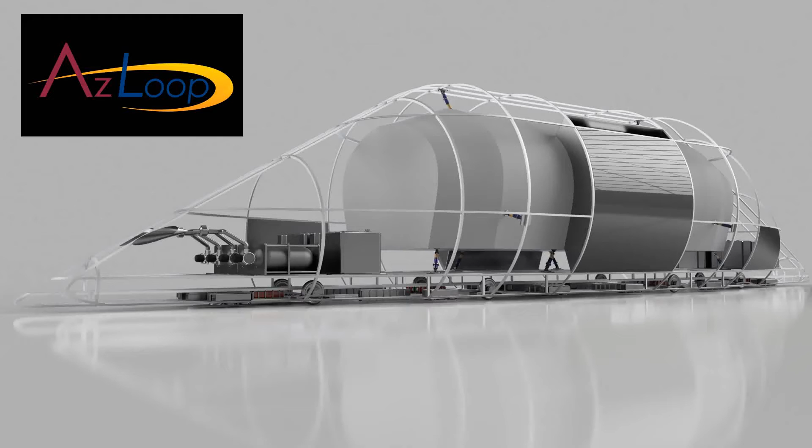Hi, I'm Gurupkar from AzLoop, and in this video I'm going to be showing you how to make the best use of the Revolve feature in Autodesk Fusion 360 by quickly modeling a tank which we are planning to use in our pod design. This is the tank we plan to use in our pod from airtanksforsale.com, and here we have a picture with rough dimensions of the tank.

Once you have the image, click on the Attach Canvas button on the top. Select the plane on which you want the canvas to be attached to and then select the image. Set the opacity and hit OK. Now we are going to calibrate the image to match the dimensions of the model. I'm going to select 2 points on the scale, one at 2 inches and the other at 12 inches. Enter the value for that distance, that is 254 mm for 10 inches, and hit enter.

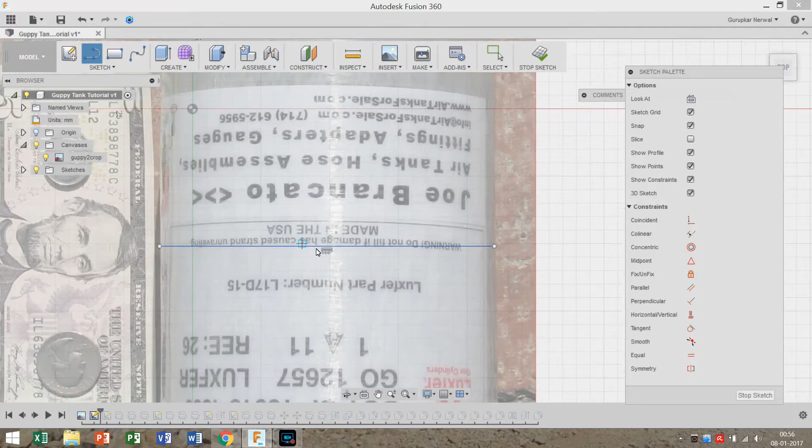I'm going to be making this tank in 4 parts: the bottom, the neck, the knob, and the dial. Also, I will use only one sketch to model some of these parts at the same time. I'm going to start my sketch in the top plane. The first step would be to find the center of the tank by tracing its diameter. Now using the midpoint of this line, I'm going to divide the tank into two halves. This line now is going to act as my axis for the revolve function.

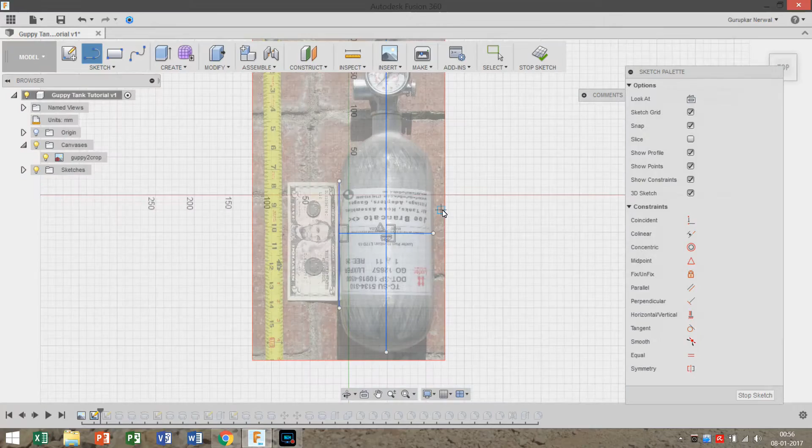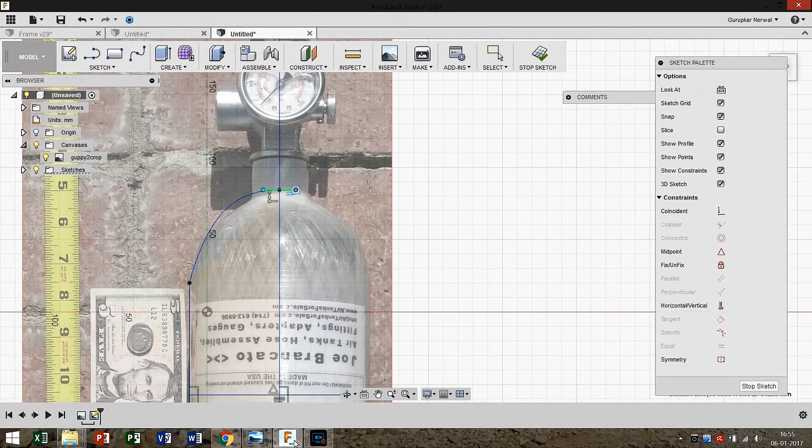Now I only have to sketch on one side of this line. I will trace the bottom part by using lines and splines. Make sure the end of the splines at the axis of symmetry are always perpendicular to it. Manipulate the spline handles to get the right angles. It is very important to achieve a smooth transition of surfaces after the revolve function or any other function related to symmetry for that matter. Trace the shape of the tank as closely as possible.

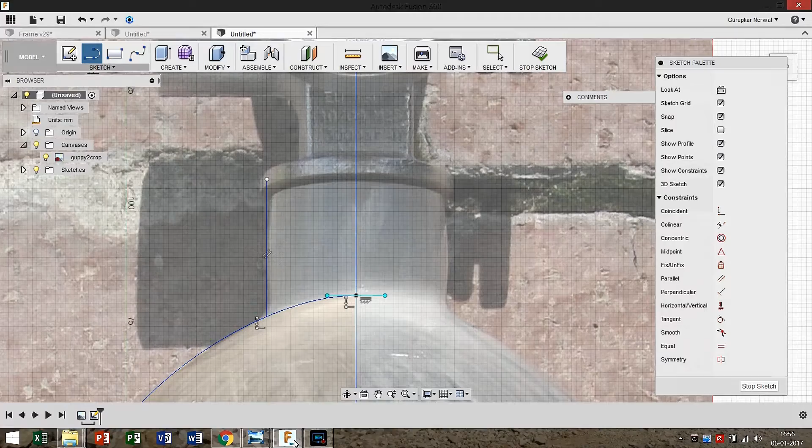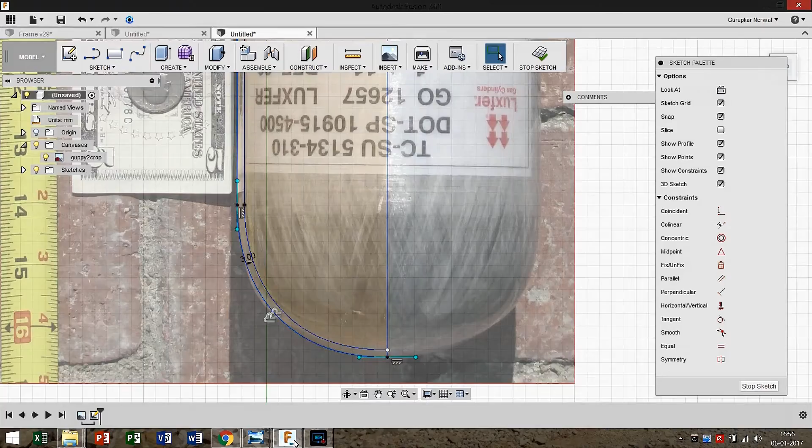In a similar manner, I am going to trace the neck of the bottom part. Trim the extra lines and then offset the profile for the required thickness. Over here, I am going to offset the profile by 3 mm. Finally, close the sketch and the profile for your first part is now ready.

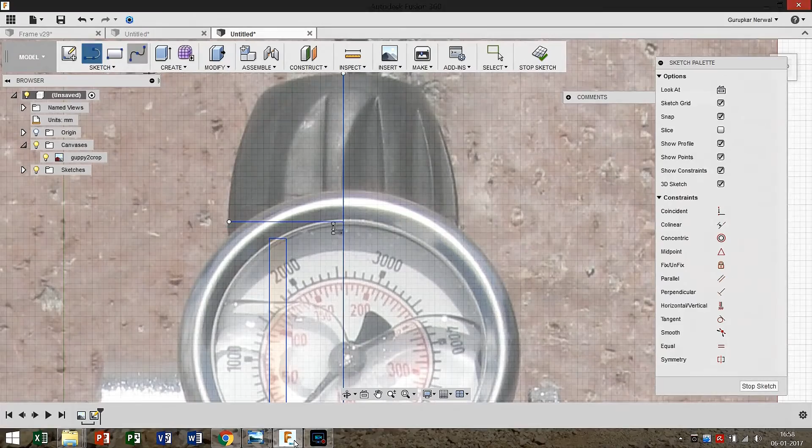In a very similar way, I am now going to complete the profile for the neck. Note that I am continuing to draw in the same sketch. This completes the neck. For the knob, I'm gonna use some more tools like the fillet tool to have smooth edges and the mirror tool to fasten the sketch and to maintain symmetry.

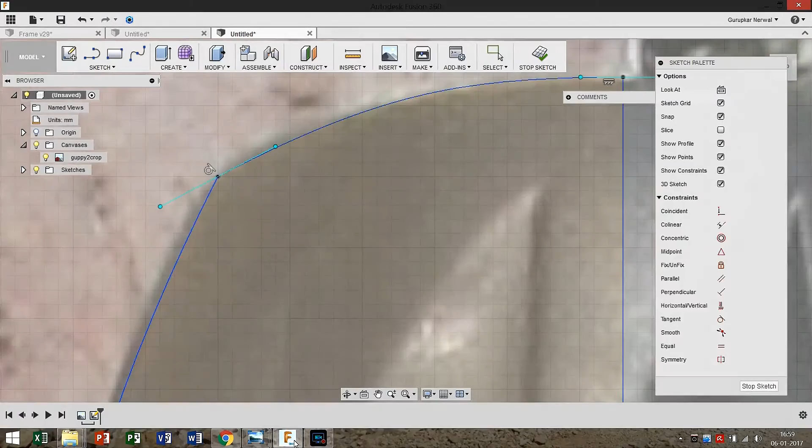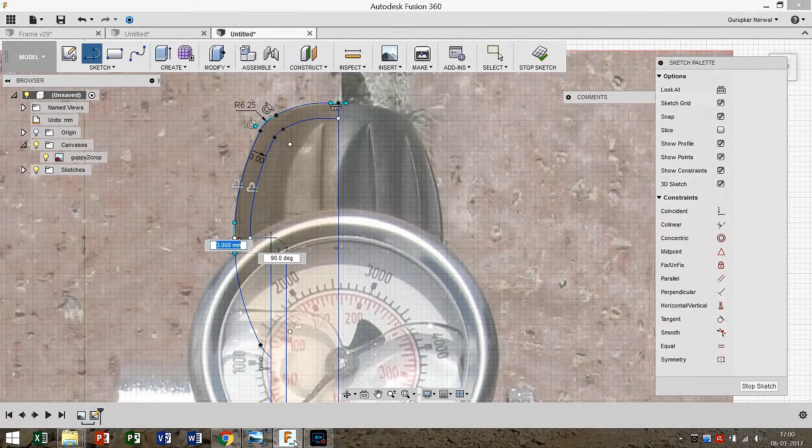Mirror is one of the tools I use very often. If you learn to use it right, it can save you a great deal of time and effort. That's one tool you definitely want to master. This completes our knob. Now we are going to revolve the sketch into 3 different parts.

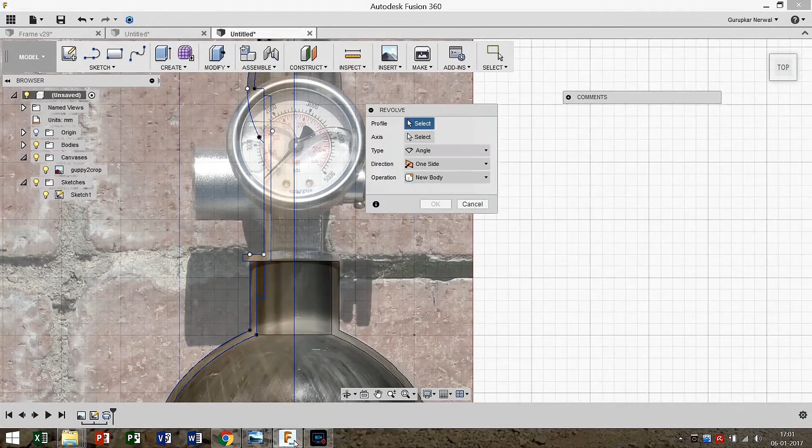To use the revolve tool, simply select the profile, the axis, and the angle. You now have a solid part. In a very similar way, now I'm going to revolve the neck and the knob profiles. As you can see, this has come out as a single part. That is because while revolving, the operation was set to join. If I go ahead and edit the revolve from the history line and change the operation to new body, I now have 3 separate bodies.

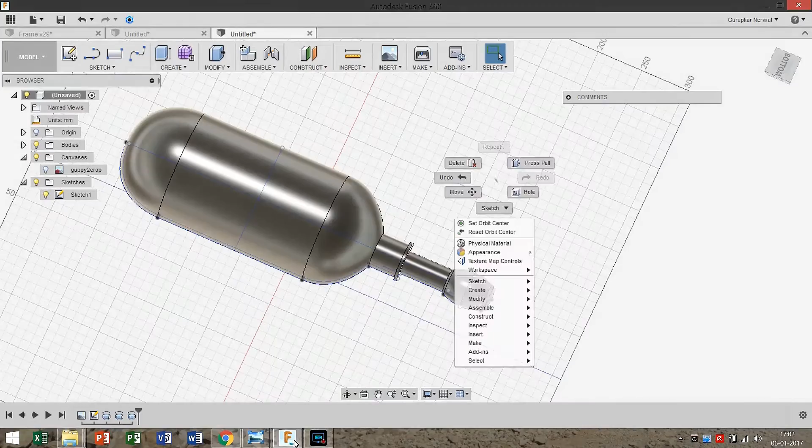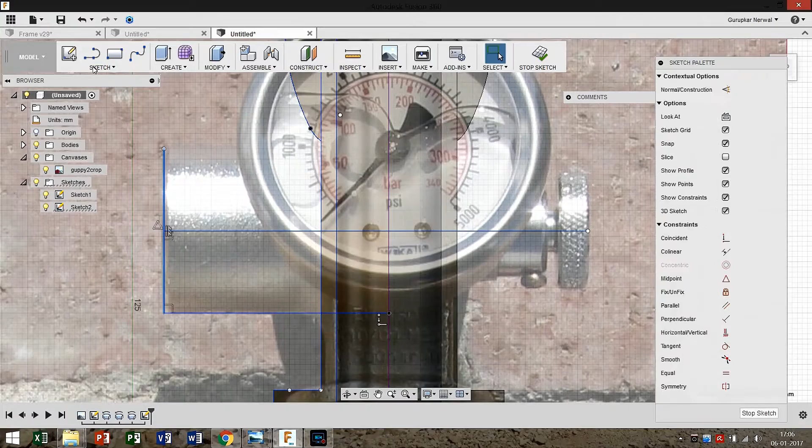To make the remaining parts of the neck, I'm going to repeat the exact same method I used up till now. The only difference is that the axis for these parts is going to be horizontal as opposed to vertical. As you can see, I first trace the diameter, then divide the parts into 2 halves by sketching a line through the center of the diameter. This line will act as the axis of rotation for these parts.

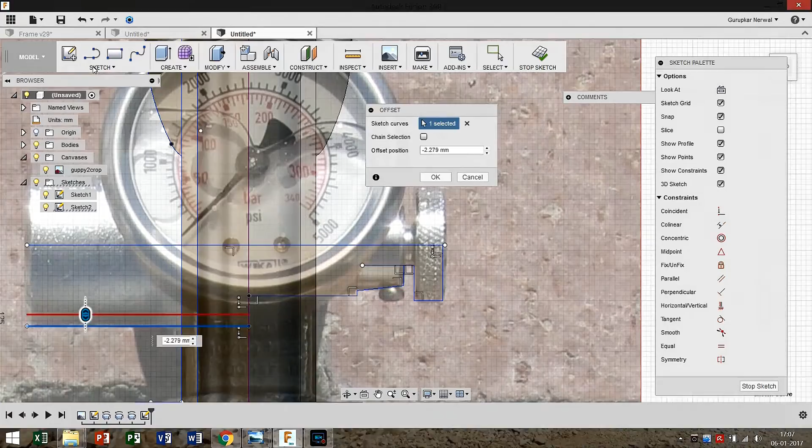Again, I will be revolving 3 different parts using the same sketch. This trick can save you a lot of hassle when you're modeling complex parts. This way you will also not have to deal with a large number of sketches as your overall number of sketches will remain very less.

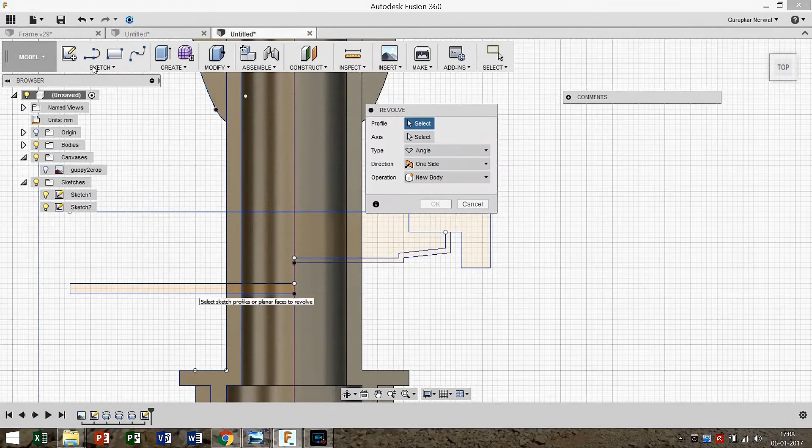As you can see, when I try to revolve these parts, they turn red, and the operation by default is set to cut. This will cut the revolved part from the selected parts. This happens when the part being revolved is overlapping an existing part. I'll just change the operation to new body because in our case I'm just going to combine these parts in the end, so it doesn't matter if they overlap for now.

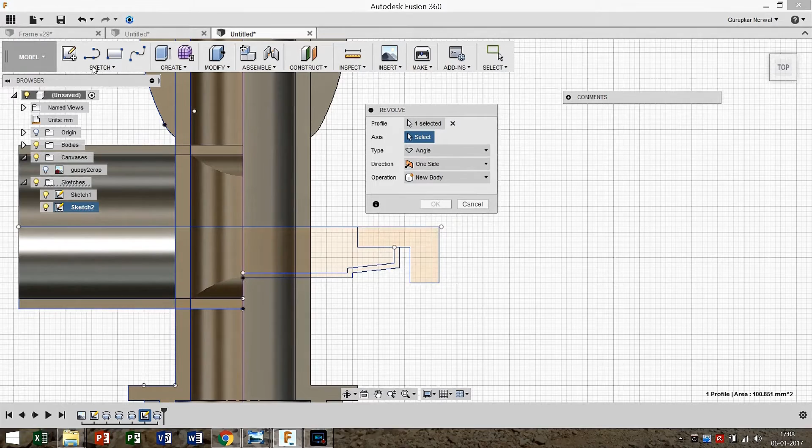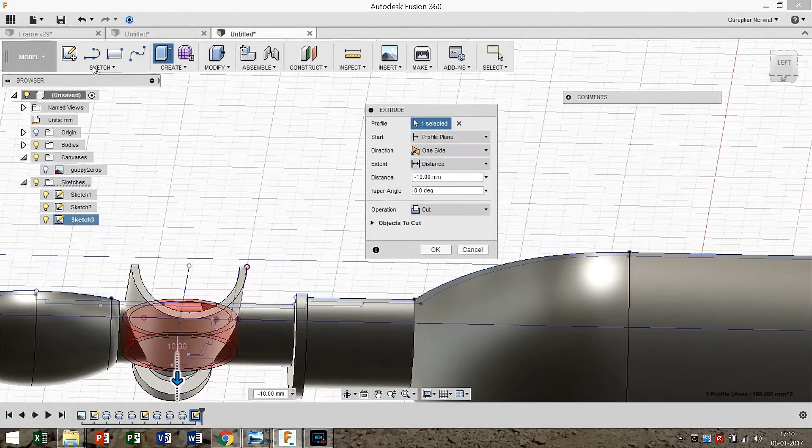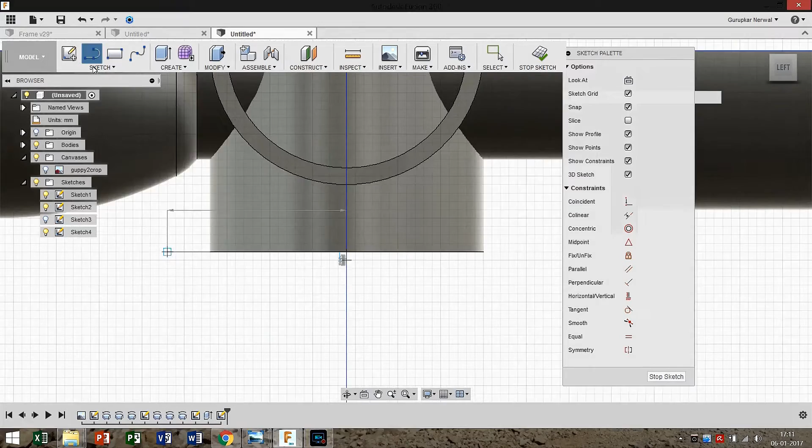Now I'm going to start making the dial assembly. I will simply extrude the neck of the dial assembly and do another revolve for the dial later on. This completes the neck. To make the dial, I'm again going to use the two revolved parts from a single sketch. These parts will be the outer cover of the dial, and the glass covering of the dial.

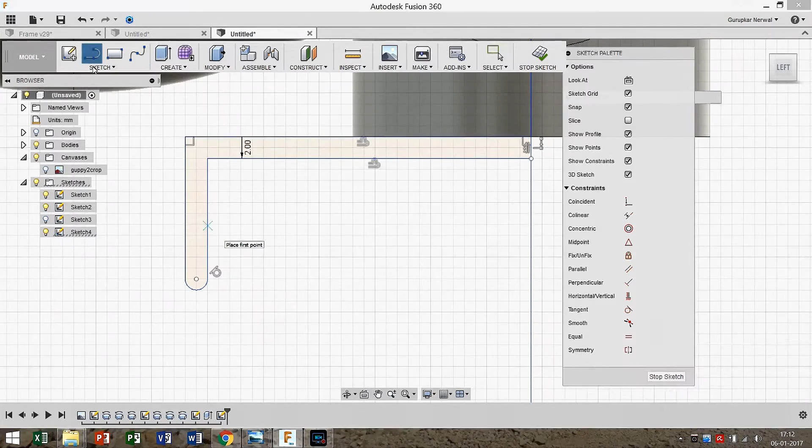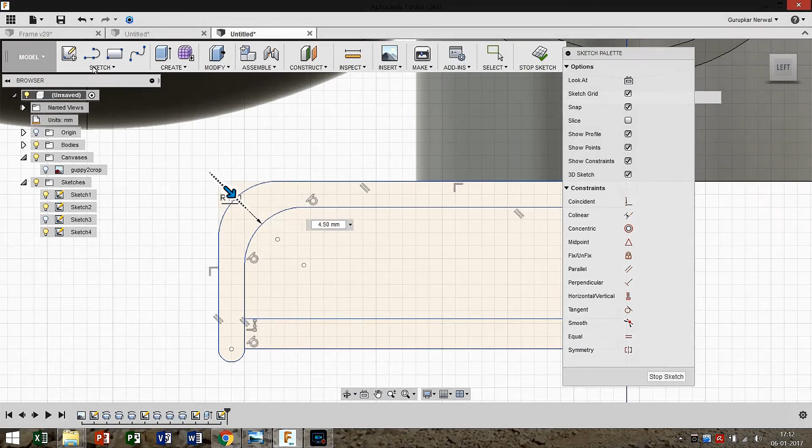As you can see, I'm using the exact same method as I've used twice before in this video to efficiently create multiple revolved parts. I'm once again using fillets for smoother edges. This will help me to get a more neat and realistic rendering of the model in the end.

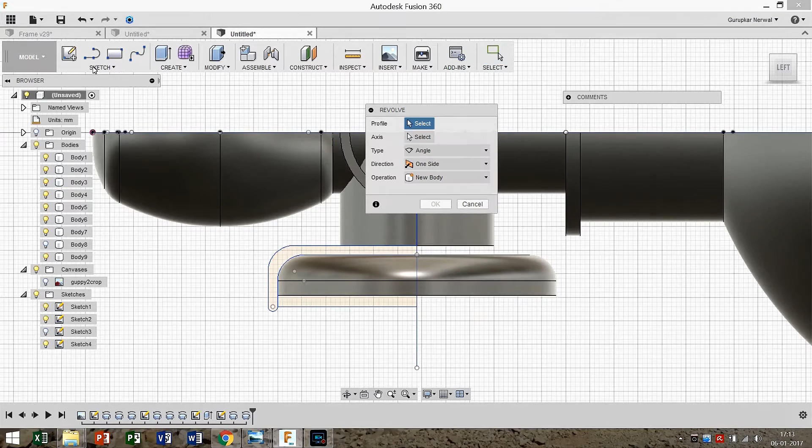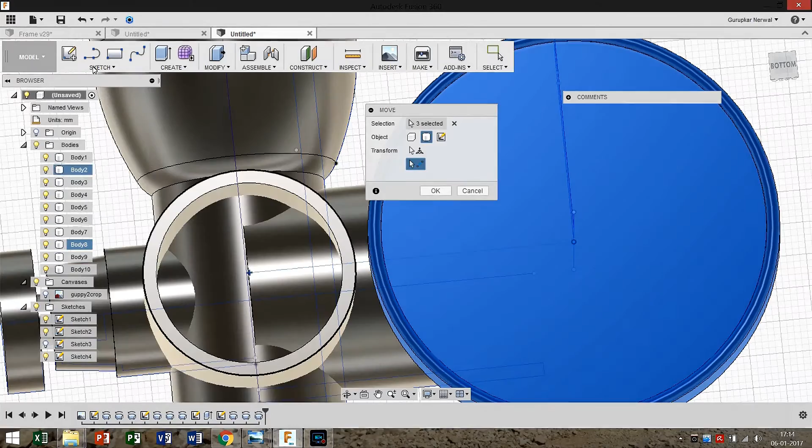Now as you can see, I did not pay attention while I was selecting the plane for my sketches, and this resulted in the dial being far away from its intended position. This problem can be quickly remedied by using the Move tool. I have found the Move and the Assemble tools of Fusion to be very efficient and fast as compared to other CAD softwares. Now our dial is in its correct position.

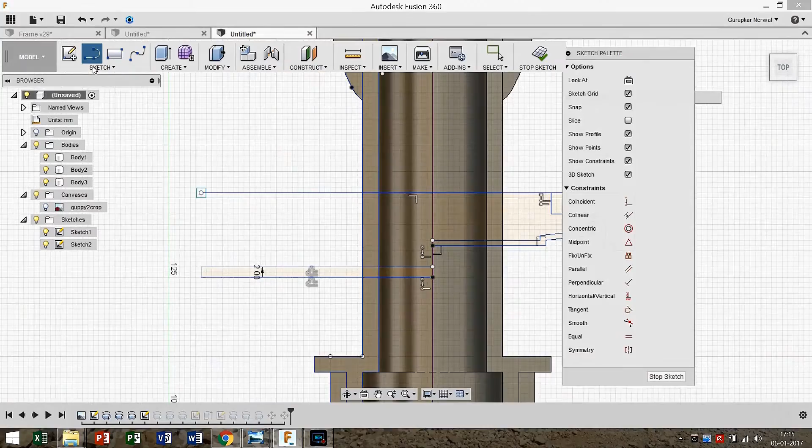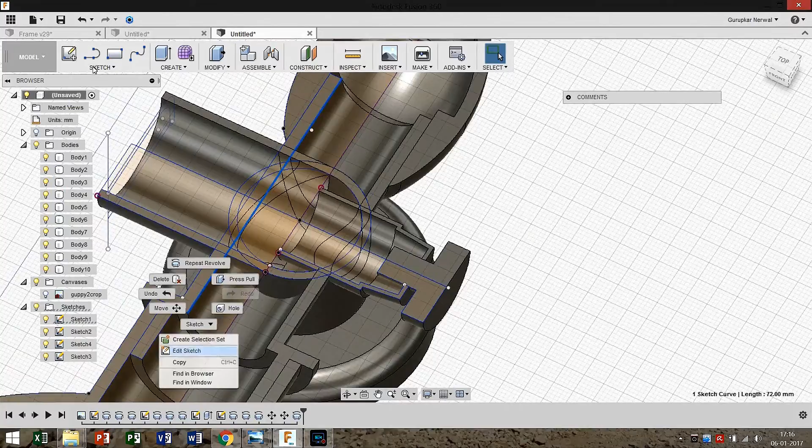Time to get rid of the excess solid material. To do this, I will again use the same sketches to revolve cut the excess material from the neck. As you can see, the red highlighted volume will cut the excess material out of the neck. I will then repeat this two more times to get rid of all the excess or overlapping material created earlier when I revolved these parts in the earlier stages.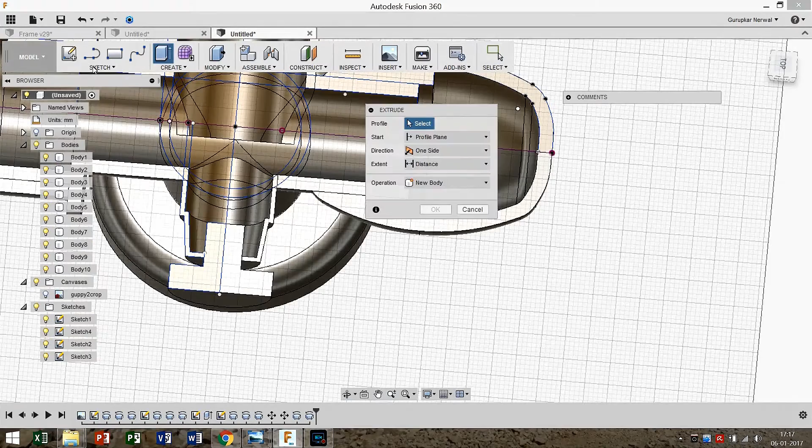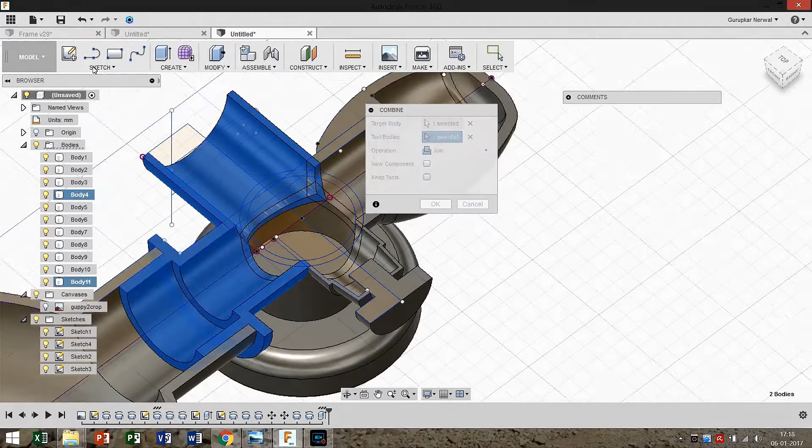After getting rid of all the unwanted excess material, I will now combine the three parts of the neck into one single part. This can be easily achieved by using the Join tool or the Combine tool. After applying some fillets to round off sharp edges, our model is now ready to be mirrored.

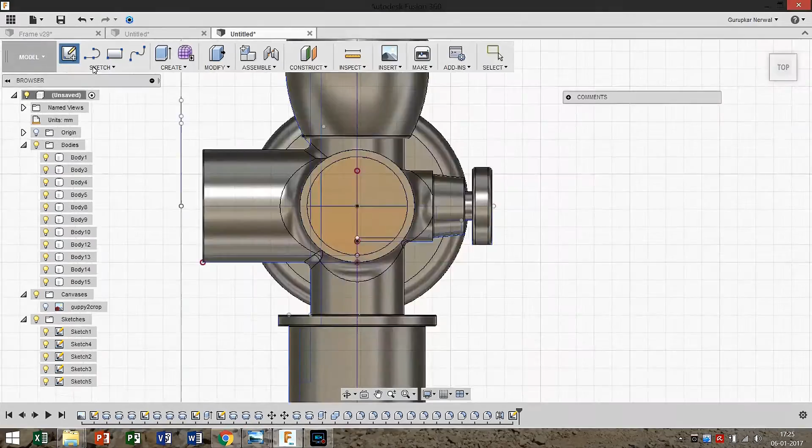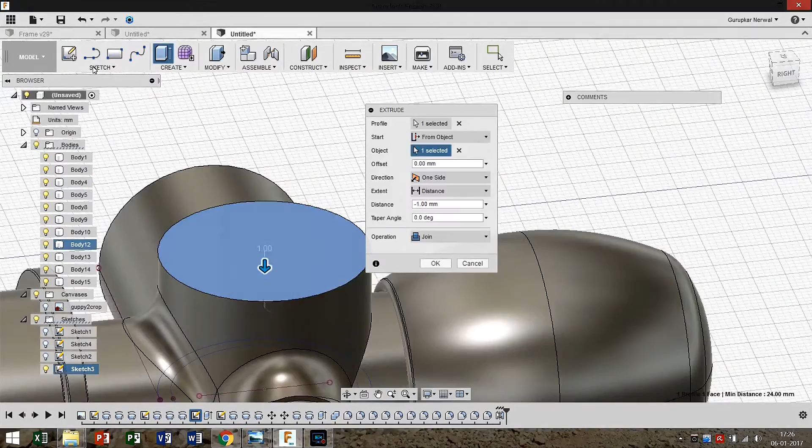As you can see, the mirrored portion has an open hole in the neck. To close this hole, I will again use one of the existing sketches and select the From Object option to create an extruded shape from an offset surface. Finally, I will give it a nice fillet to blend it in the neck. And now our final model is ready.

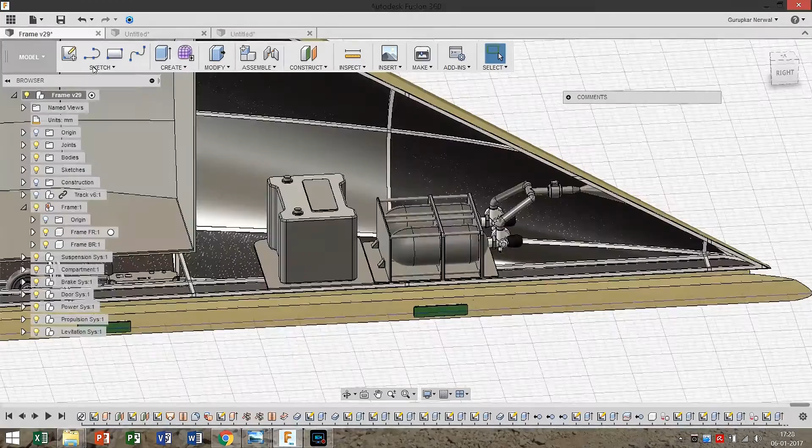I can now use this model to see where, how, and if it will fit in the pod design. This is a very quick and efficient way to start a design process.